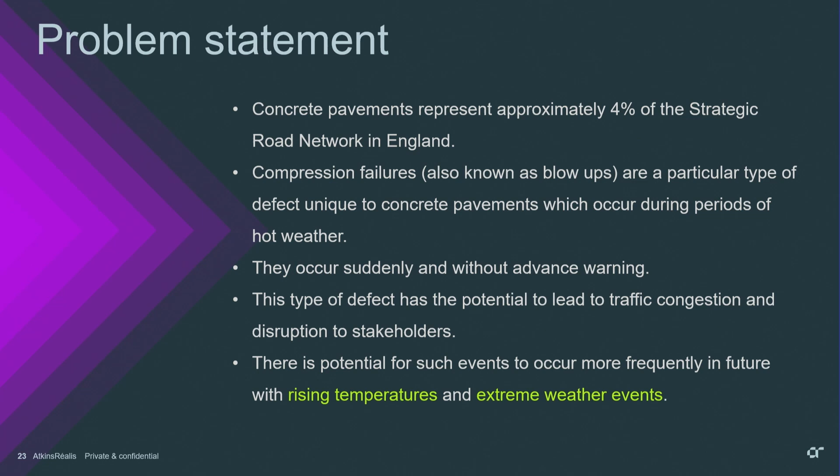They occur suddenly and without warning, and obviously that's a massive issue on the strategic road network carrying lots of traffic. And it can lead to severe congestion because we haven't planned it, and massive disruption to the stakeholders. Importantly, with the effects of global heating, rising temperatures, extreme weather events, the chances are these types of defects are going to occur more frequently in the future. So this is about planning to deal with that.

So what was the project scope? We're looking at approaches and methodologies to develop an assessment method for identifying and managing the risk of concrete blowouts. There you go, there's another slightly different term. That's why we're going to try and stick to compression failures. So what were our objectives? We need to develop this assessment method to determine which locations on the SRN are most at risk from these types of failures. And then we need to suggest some remedial actions. How are we going to fix them? That could be things like full depth repairs, bay replacements, etc.

And then we need an asset management strategy to make sure that those people who are managing the strategic road network on behalf of National Highways know what to do to try and predict when these might happen and what to do to remediate them when they do happen. Just for interest, there's a photo there of the A14 in Suffolk, and you can see that deterioration in the concrete pavement there.

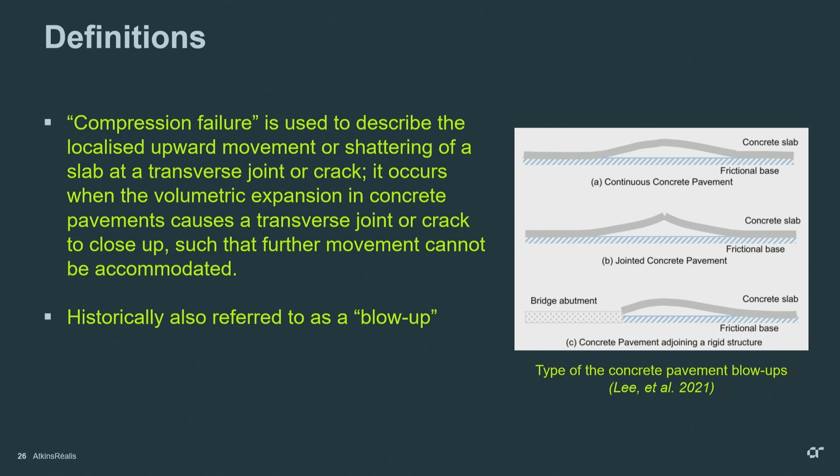That may be a contraction joint or an expansion joint. Two slabs come together, they can't move any further, the concrete has expanded under the heat, and bang, up it comes. It can also happen where a concrete pavement is terminating, particularly against a bridge abutment. That's probably a slightly more unusual situation for the UK because we would normally have a transition before we went to a bridge, but in the States that's a more common way that it looks.

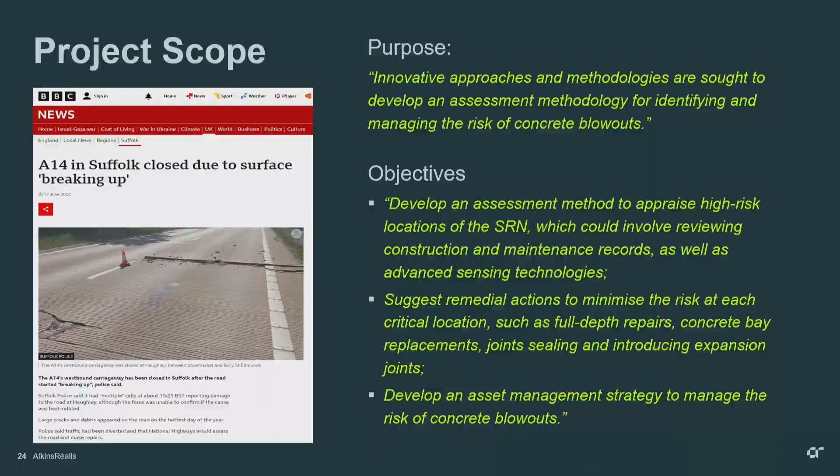And if I just nip back, if I can, there we go. So what you can see there is exactly what's happened. Two concrete slabs, they've come together, they've pushed up, and the concrete has effectively exploded at that joint. Obviously, that's a massive issue for the travelling public. It's very dangerous. If a car was to drive over that, or a motorcyclist was to ride over that, it could be really, really serious. So it's very important that we know when these are going to occur.

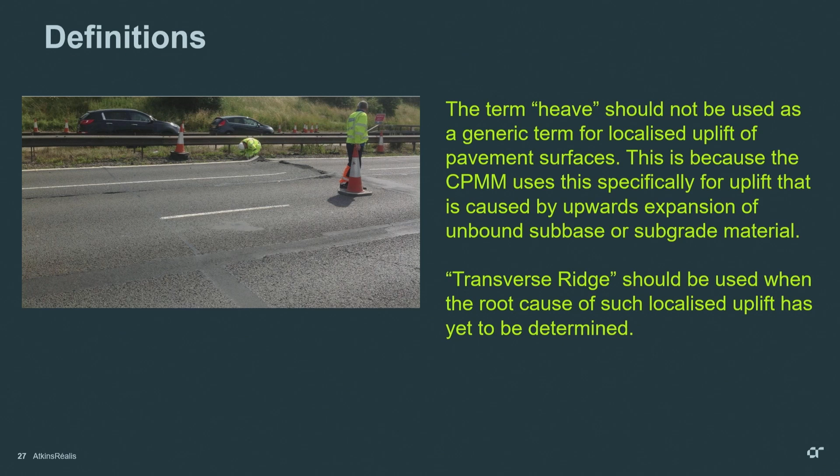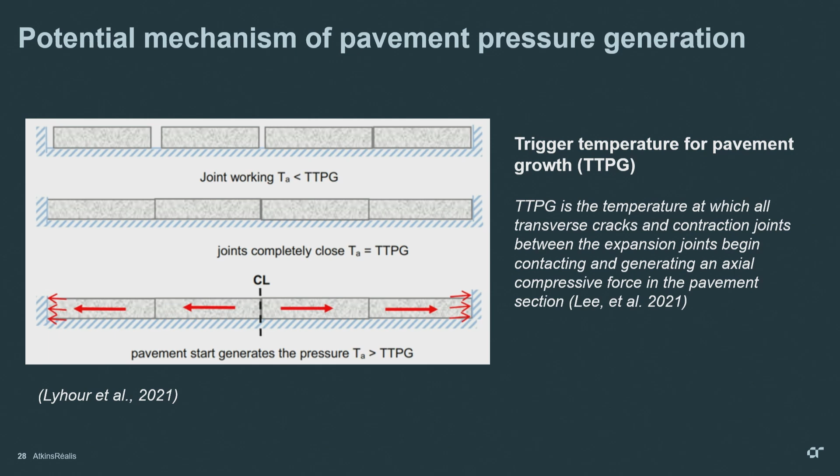So what was the project all about? We had a desktop review where we were looking at what was out there on compression failures. What were other countries doing to deal with compression failures? Did they have mitigation methods? Did they have prediction models? We also looked at the possibility of using condition data to help predict when a compression failure might occur. And then we undertook a feasibility review of how we might rate the risk in pavements of this occurring.

Obviously, the key thing for National Highways is, can they prevent it from happening? If it does happen, what do they need to do about it, and where was it most likely to be? And then after it's happened, what do they need to do to remediate it, to reduce that risk?

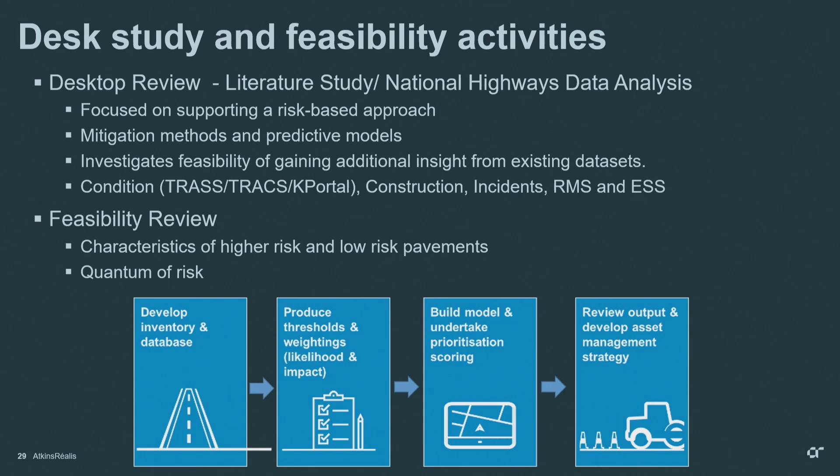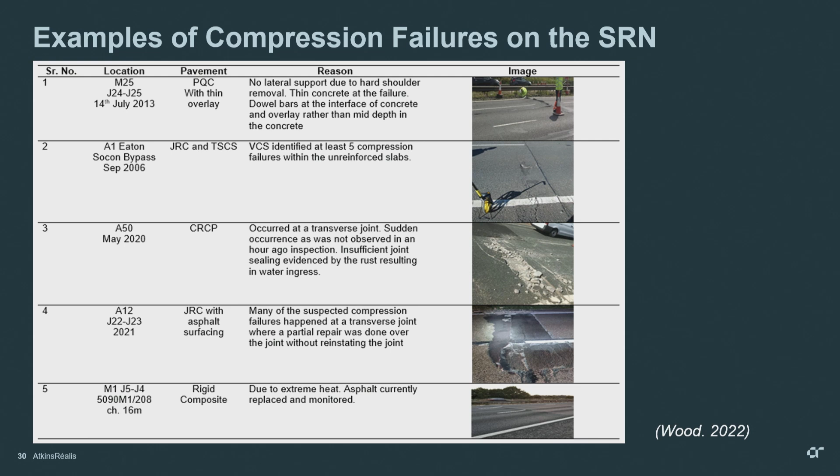So we had to develop an evaluation method, and we had to think about what factors would be likely to affect this. Obviously pavement type. We know it happens on all of them, but is it more likely on some than others? Things like foundation type. Is it different if it's got an unbound foundation or a bound foundation?

We suspect it's probably got something to do with the time of year that the pavement was constructed, because we know that there's a difference in terms of the state of the concrete, whether it's constructed under cold conditions or hot conditions, and then whether the expansion joints will be able to function if it's been built under cold conditions.

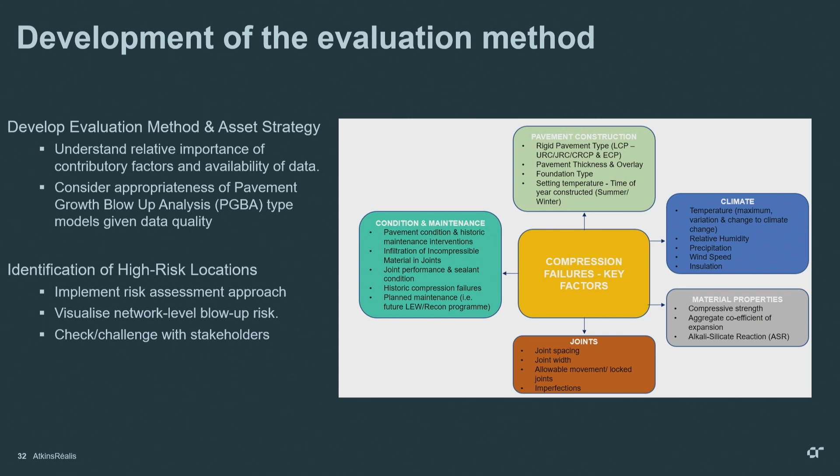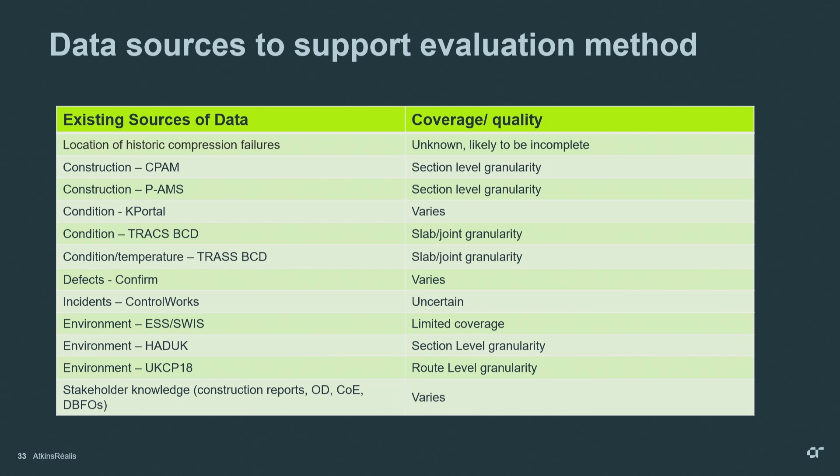Always we're going to have gaps and we're going to have issues, and we had lots of different data streams that we needed to bring together to really characterize the information we would need to try and develop this model. And then on top of that, we had environment data. So not only current temperature conditions, so the temperatures that the compression failures occurred that we know about, but what's going to happen under global heating? What's the temperature going to be like in 5 years' time, 10 years' time, and is that going to increase the risk?

And one of the big things that we really didn't know about, that all the research said was going to be really important, was incompressibles, material getting into the joints of the concrete pavement that stopped the joint from working as it should do. We all know how important it is to keep joint sealant in a good condition for a jointed concrete pavement to function.

If that sealant's not there, small pieces of aggregate, even nuts and bolts, can get into joints, and then once they're locked up, they can't make that movement. And all the international research said how important this was, but it's just not data that we've got or could even get, really.

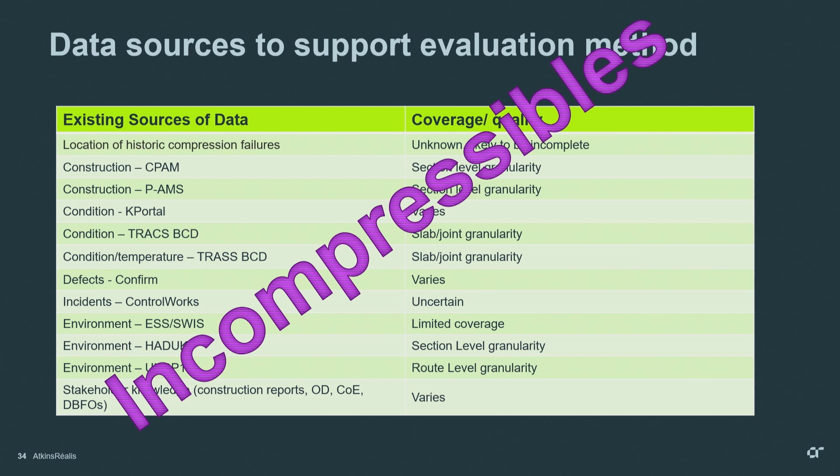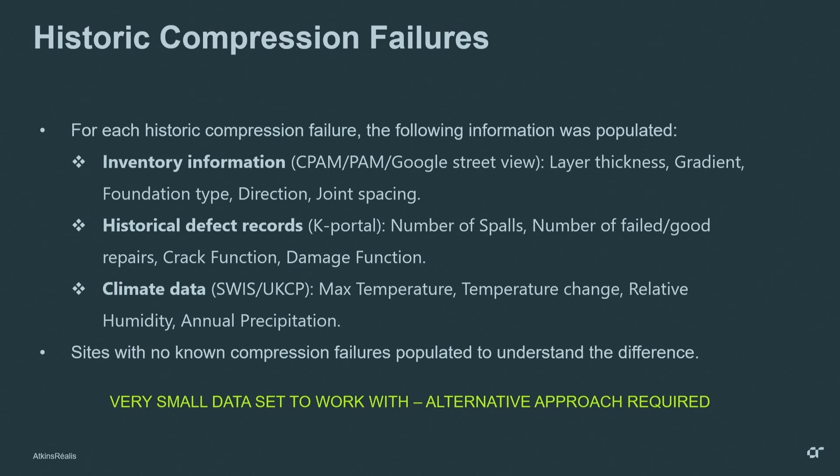So for the sites that we looked at for National Highways, there were 16 sites that they originally provided us with, and when we started to dig in, really there were 7 sites that we could find that we were really confident about. We knew everything about them, got all the data that we could, and we were feeling good. There were another 8 or 9 sites which basically had critical information missing. So we were really restricted to a very, very small data set. So what we did was we had to go away and collect all the information for those and really try and understand what it was that was causing those compression failures.

When you're working with a data set that's really only got 7 points in it, even though you've got lots of associated data for each of those 7 points, it's quite hard to do a sort of standard analysis technique. You know, normally we'd have looked maybe at a multiple regression. That's used in lots of pavement design stuff, but unfortunately our data set was so tiny, that was not something that we could do. So we had to look at it in a different way, and we used something called anomaly analysis. I'm glad that's out of the way.

Which is a statistical technique that's used commonly in things like the aircraft industry when they want to understand about jet engines and why they fail. They've got loads of data of jet engines that work, and a very small amount of data of jet engines that don't. So in a way, we had the same thing.

We've got loads of data about concrete pavements that don't have compression failures, and we had a really, really little bit of data about where they do. So we fed all of that information about the good sites into the model, and we trained it to try and find what was the combination of parameters that would make it say that one's more likely to have a compression failure.

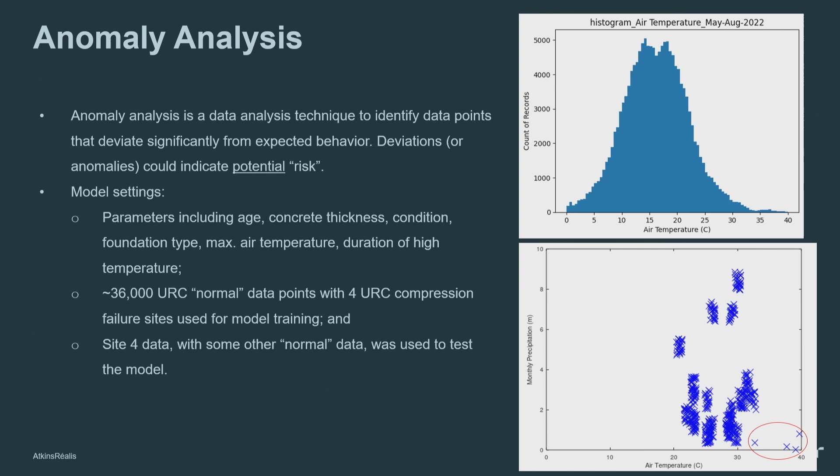So once we'd trained the model and set it going, we asked it to find the top 10 sections with the highest risk of compression failure on the strategic road network. And this is at section level. So this is the pavement management system section level. So it's very granular. These are typically 100-meter sections. But we asked it to go and find it.

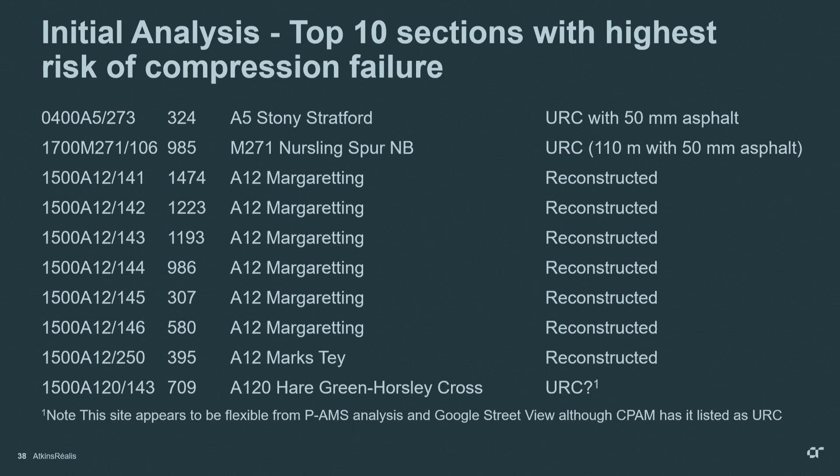And you can see from that list there, very, very comfortingly, the sites that it picked are actually mostly sites that have already been reconstructed. So the highest risk ones had already been identified elsewhere within the concrete roads programme to say these pavements need reconstructing. They're at the end of their life. So we got great confidence out of that. And in fact, A5 Stony Stratford is in the Life Extension Works programme. So this gave us confidence that the model was really doing what we wanted it to do.

So we took those sites out that had been reconstructed, and we reran the model to find our next top risk of compression failures. Again, this is really great. It's picked out some stuff for LEW, and it's picked out 3 sites, the 3 ones in white there, which now, from a risk of a compression failure alone, in the next 5 years, so in the next road investment strategy period, those sites, the M11, Junction 9A to A11, and the Nursling Spur, are at the highest risk of compression failures on the strategic road network.

Now, we're not saying it's going to happen in the next 5 years, and we're not saying go and maintain those now. What we're saying is a strategy needs to be developed to monitor these so that we're ready to deal with it should it occur. And obviously, there's a huge amount of uncertainty built into it because we're using a climate model to model what the temperature will be in the next 5 years.

And from looking at those models, we can tell that this is an unrestrained scenario. So this is no change to emissions at all. And what this would show is that in the next 2 years, we're going to get very, very hot summers. And that really is going to increase that risk massively. And then the temperature tails off. Now, whether that really happens, do we get our emissions under control? Do we start to make some dents into arresting global heating? Then that risk recedes. But those sections will always be more at risk than other sections of the strategic road network.

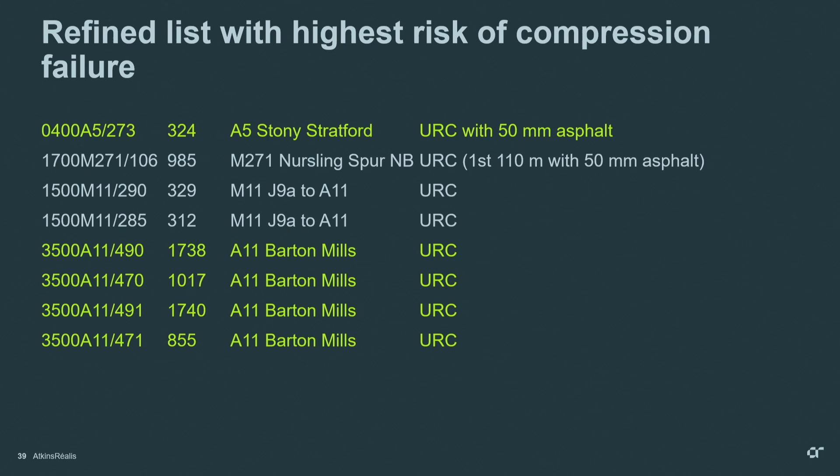Next bit of the project is to develop a data visualization, and this is underway at the moment. So effectively, we're going to use a dashboard type tool, which will allow National Highways to drill down into this data and understand what it means. They'll be able to look at it by different pavement construction types for their own region. And the idea of this is to allow Operations Directorate to really get a handle on what they've got in their region. But it also makes it really easy to see what's going on.

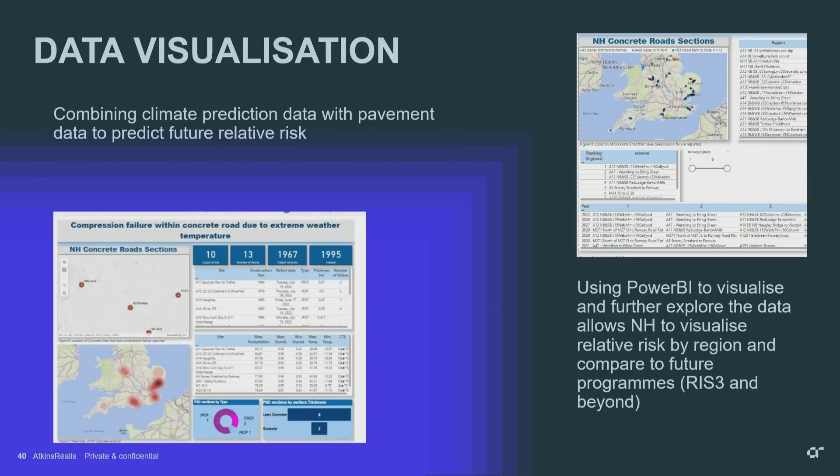It also means that we can use life cycle extension works projects. If those are coming up on sites that are identified for high risk of compression failure, then perhaps the treatments can be targeted to address that. For example, by introducing some new expansion joints. If we're doing a concrete bay replacement, we're doing that by right anyway, but making sure those go in and making sure those are functioning, and replacing joint sealant whenever we get the opportunity to guard against that, basically.

And we've looked at mitigation measures, as I say, internationally, and really the introduction of expansion joints is the number one method of mitigating against this happening. So, that's what we'll be focusing on when we write up the asset management guidance, which is the next phase of the project.

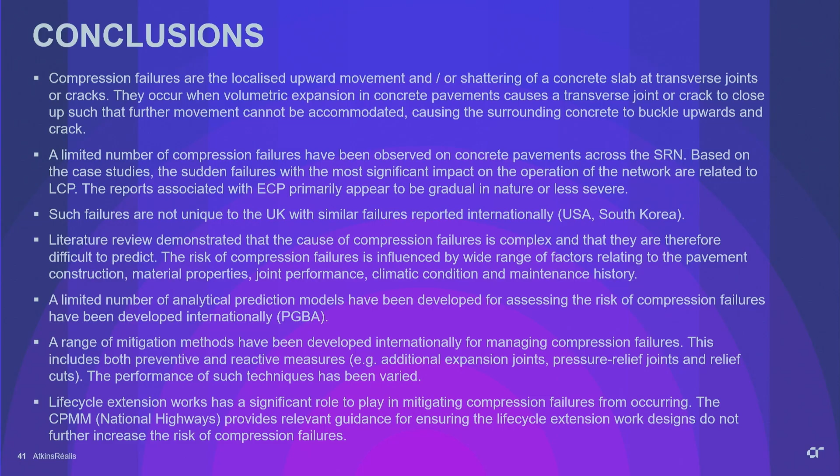And control. So if we've got a route that we know is at high risk, do we increase our inspection frequency on that route to make sure that we catch it before an incident occurs, or if an incident has occurred, we catch it quickly before there's obviously damage to the travelling public.

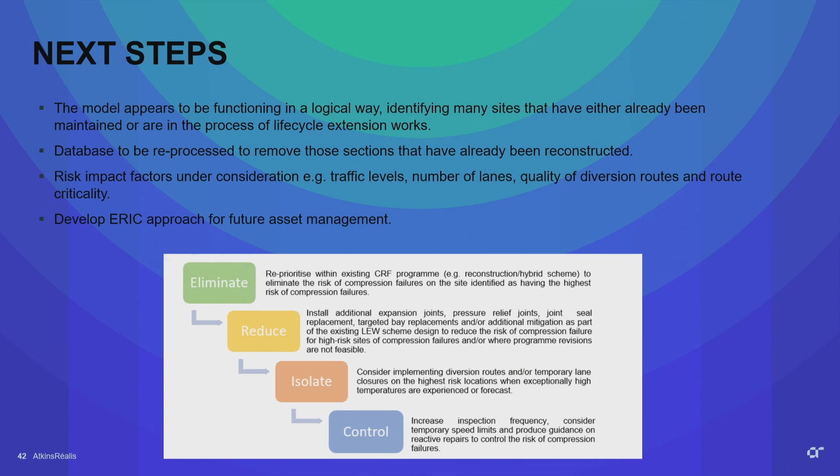Time of year. I have a view that time of year has a massive influence on compression failures. So much so that it's actually best not to construct in cold winter times. Is that built into your consideration as risk of failure, pavements that have been built in the winter as opposed to in the summertime?

Yeah, absolutely. We looked at this early on in the project. The problem is, as always, getting the data. A lot of these pavements were obviously constructed 40 years ago. We might have a year of construction. We certainly don't have a season or a month of construction.

Okay. So maybe the advice for new design and repair design might consider more movement joints if constructed in the winter time than in the summertime. Yep, absolutely. Totally agree with that. We can't say let's build everything in the summer. That's not realistic. But if you are going to build in the winter, including additional expansion joints is 100% a sensible thing to do.